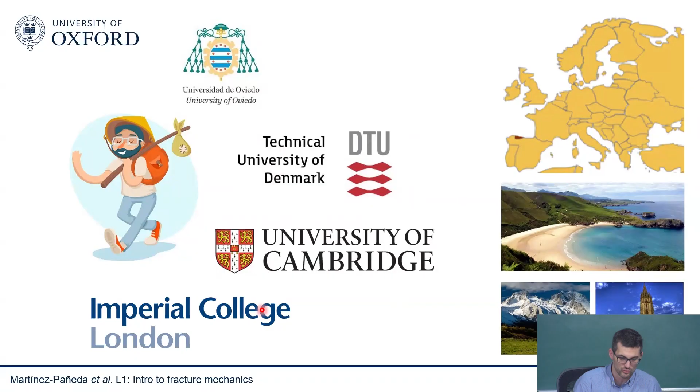This was September 2019. I stayed 4 years at Imperial, where I was a lecturer, which is equivalent to US assistant professor. Then became senior lecturer 2 years later, and then a year later became a reader. And then since a year and a half ago, I moved to the University of Oxford.

It's a great place, I feel very privileged to work there. It's a very old university with old buildings, as you can see here, and very old traditions.

We're a bit Harry Potter style, so we have these formal dinners. Some colleges have it, we all belong to a college, it's a bit of a long story. We have these formal dinners with our gowns and so on. Some colleges have it every day of the week, my college has a couple of days per week. So if you're around in Oxford, let me know, I'll be happy to invite you to one of those dinners. But yeah, it's a great place.

I think it's a very international environment, of course. There's people from everywhere, also from India, lots of people from India in fact. But it's the best students from all over the world, so it's really a pleasure to work with people there. It's really a great place, I feel very privileged to work there.

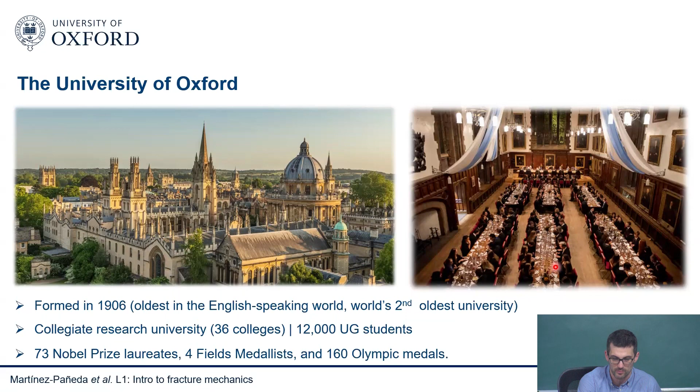What I do at Oxford is I lead a research group called the Mechanics of Materials Lab. It's a very diverse and relatively large research group, one of the largest in the department I've been told. So we have now 11 postdocs and 10 PhD students, and you can see it's quite a diverse group.

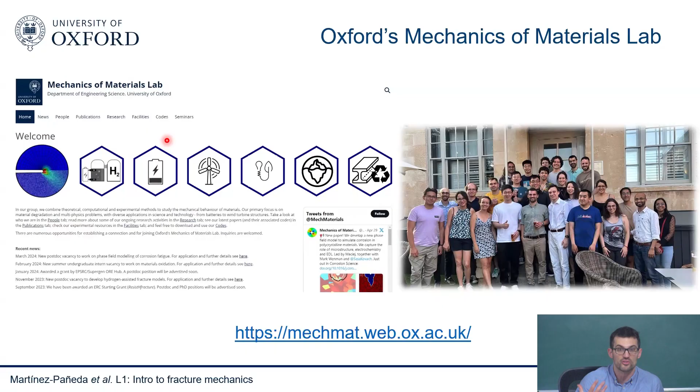The problems are exciting. They're fundamentally challenging, but at the same time useful to society and interesting from an engineering perspective. So we're working on a wide range of problems along those lines.

Some of them you can find here. We do a lot of work on structural integrity, related of course to the energy transition, but not only—lots of interesting problems across. If we think of applications: offshore wind energy, nuclear power plants, and so on.

We're also interested in iceberg calving. This is again related to climate change, in the sense that whether sea level will rise a certain amount, or more or less, depends on these fracture problems—basically crevasses growing in an ice sheet. So we're trying to use fracture mechanics to predict sea level rise more appropriately.

Rock fracture as well, of course. The mining industry consumes 6% of the world's energy consumption just by breaking big rocks into smaller rocks. So by understanding fracture mechanics, we can bring down that number.

Low carbon cements—there's a lot of interest in cementitious materials, particularly in changing Portland cement for other binders. So we need to do some sort of micromechanics to understand how these new low carbon cements will behave and what their structural performance will be.

Corrosion and corrosion fatigue—problems at the interface between mechanics, material science, and chemistry—are critical to many applications. They've been a problem for society for a century, and they're critical to applications like nuclear power or offshore wind energy. Concrete durability as well—there's a lot of work going on in corrosion of concrete.

A lot of computational mechanics too. In fact, we do both experiments and modeling in my group—I'd say roughly 30% of the group does experiments, 70% does modeling. But mostly this week I'll be focusing on our computational efforts.

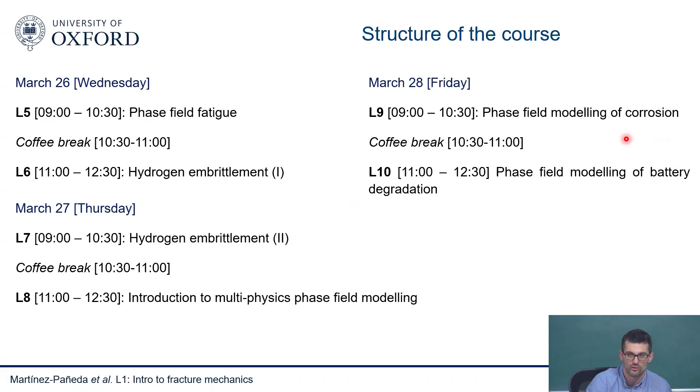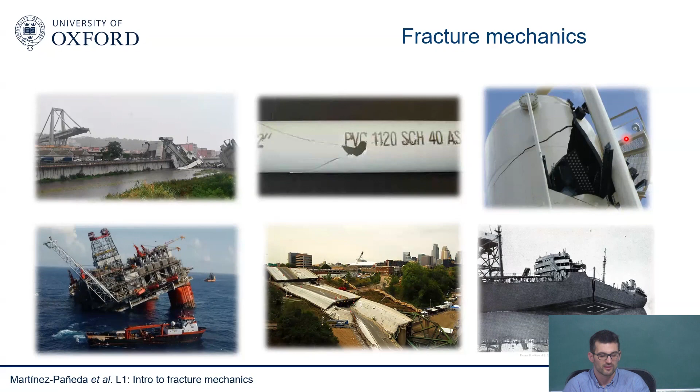So, okay, what can we do? How was the discipline developed? I think the best way to look at fracture mechanics is by taking a historical perspective. When did humans realize that things were falling down and they needed to come up with a scientific discipline that would explain how things fail and what to do under those circumstances?

And I think the topic is of course old - things have been failing for quite a long time. Of course many old constructions remain; if you go to Rome you'll find the Colosseum, which is an amazing structure. But for every old structure still standing, many temples around us have collapsed and we just don't know about it. For example, just 5 kilometers from the Colosseum, the Fidenae amphitheater collapsed, and 20,000 people died. So we know about the Colosseum, but we don't know about this - many things fail.

I think historically it's fair to say that engineers back then did more of a trial and error approach. They tried things, and when they didn't work, they adjusted. I think this amphitheater was actually made of wood, and they said, okay, wood doesn't seem to be good for these things, we'll do something else. So it was very much based on experience. In fact, legend has it that the Romans would ask the engineers and their families to sleep below the bridge they had just built, or the aqueduct, over the first night, just in case it fell down. They would be the first to suffer the consequences. I'm not sure if that's true, but it's a way of natural selection, I guess.

What worked in favor of the old engineers is that back then they were mostly working with brittle materials such as rock, mortar, or clay, and that's good and bad at the same time. Of course they're brittle, but at the same time they work very well under compression. Under tension, no way, but under compression they work very well. So they soon learned that what they had to do is work under compressive loads, so they came up with arches and other ways to make sure they didn't have any tensile loads. They were very limited in what they could do—you could say always the same shapes—but at the same time they didn't experience those tensile stresses that would fail their material.

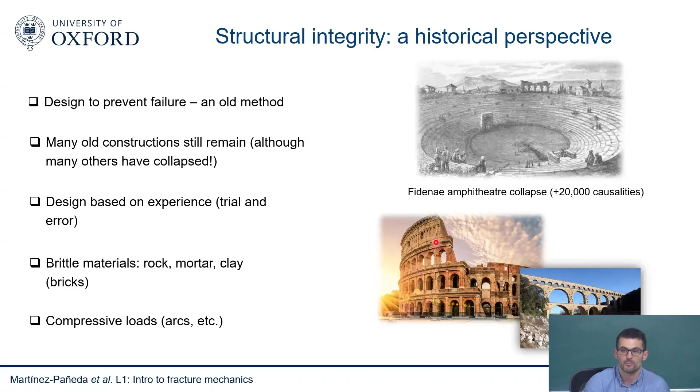Then the Industrial Revolution came, and new materials came around, metals being particularly prominent. Those, together with advanced design methods, allow us to design very complex structures, dealing not only with traction loads but very complicated stress states. That was, of course, a revolution, but it also brought new challenges and new fracture mechanics problems.

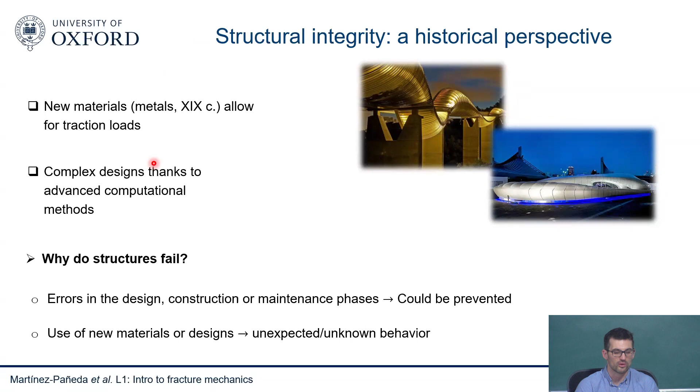In general, you could say that failures happen due to one of two reasons. One is human errors—errors in the design, construction, or maintenance phases. These are things we could have prevented; things failed under conditions that we understood, but we made a mistake, and as a result we got a failure. Or things fail due to the use of new materials or designs—this is unexpected and unknown behavior. Failures in modern aerospace technology wouldn't happen if we didn't have modern aerospace technology. So every time we use a new material or new technology, there's a challenge that comes with it, related to our lack of understanding, basically.

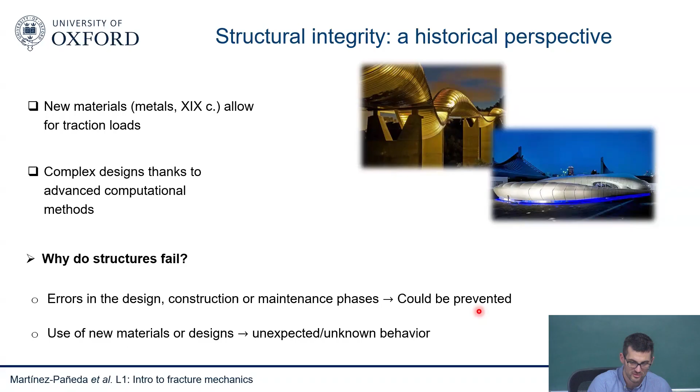If we think of failures due to new materials and designs, we could think of the failures in polyethylene gas pipelines that occurred in the UK and many other countries in the 90s. We used to use metals for transporting gas, and we still do, but there was an idea to replace them with polyethylene. We thought, okay, it's lighter, it's cheaper, it doesn't suffer from corrosion. But what they didn't realize is that it suffers from other problems, such as some sort of creep damage, which takes a long time to happen. It's not something you see quickly in the lab, so when they did their quick experiments, they didn't see it. But then over long time exposure, those cracks happened, causing a lot of explosions and issues.

Another very classic example is the Space Shuttle Challenger disaster. This happened a long time ago—I suspect none of you were born back then, and I wasn't either. But if you ask your parents, mine claimed it was a big deal. All the people, all the astronauts inside, died. It was a big problem for the aerospace industry. And of course this was NASA, so they were testing things properly—they knew what they were doing. But the problem is that one of the gaskets they were using was tested under room temperature conditions, and it became much more brittle under low temperature conditions. This gasket was exposed briefly to low temperatures, but for a sufficiently long amount of time that it caused embrittlement and fracture, leading to the disaster. So even though we test things carefully, every time we deal with new technologies, we need to think very carefully about what we do.

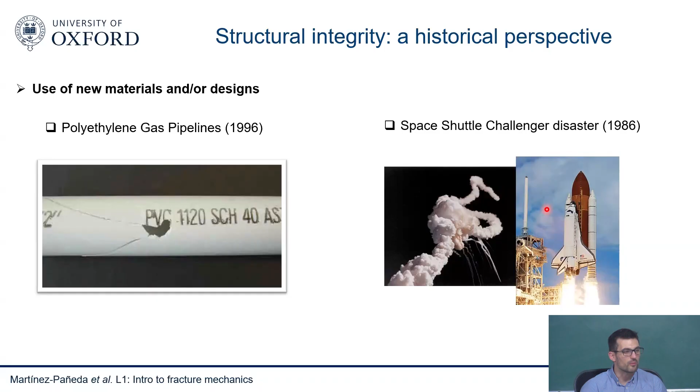Other classic examples are the Liberty ships. This is the classic example that gives you the birth of fracture mechanics. As part of the Second World War, the US was trying to help Europe, the Allies, so they tried to build ships as fast as they could. They built, I think, 3 ships every 2 days through the use of technologies that would really accelerate ship production. Back then ships were mostly riveted, so they had riveted joints, but the US decided to accelerate the ships by using welded joints.

And nowadays we weld, most ships are welded, but back in the day it was a new technology. What they didn't realize is that those welds would suffer, particularly in low temperatures, so lots of failures happened. I think they did almost 3,000 of the ships, and they saw cracking in 1,600 of them. So more than half of those ships underwent cracking, and 18 of them cracked in half, with, of course, a big loss of lives and resources. This happened due to a lack of understanding of how those welds would behave, and some sort of brittle-to-ductile transition, and some hydrogen embrittlement too, when those ships were going through near the North Pole.

Another classic example is the de Havilland Comet aviation accident. You may wonder when you fly on a plane why the windows are rounded. Well, of course, sharp corners lead to stress concentrators, so that's why we make our windows rounded. Back in the day, in fact, the windows had sharp corners, like they had in our house, basically. And you can see that nowadays it's quite blunt, quite smooth. You can see why.

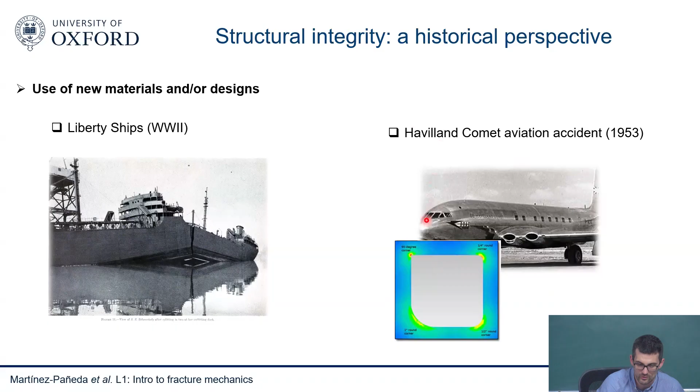This is a finite element analysis. You can see that in sharp corners you're going to get a higher stress concentrator, so you're going to have higher stresses, while if you have smooth windows, it's going to be a completely different picture. There were a few accidents, particularly this de Havilland Comet aviation accident, where you have fatigue cracks propagating and you lose part of the infrastructure of the plane, and they decided to change to smooth windows. But we're learning from those things, particularly through the birth and growth of this discipline of fracture mechanics. Bringing fracture mechanics into standards led to a significant reduction of those accidents.

Here is some old data from pressure vessel explosions in the UK. You can see how both the number of explosions per year and the number of people killed or injured are going down dramatically, as we get a better understanding as engineers and incorporate safer practices. Of course, cracks are responsible for most of these explosions, mostly due to fatigue or corrosion fatigue.

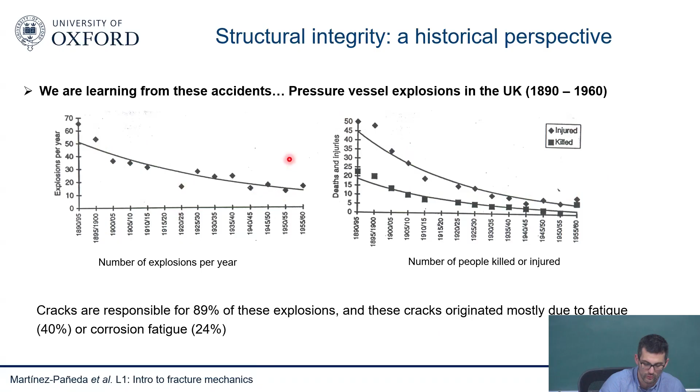So how did we learn? Of course, we always learn the same way, using what we call the scientific method. We come up with a hypothesis. We say things fail because of X. Then we think of an experiment, and we do an experiment to test this X phenomenon. Then we figure out whether our hypothesis is correct, or we refine our hypothesis and keep doing experiments.

I guess the first person to start doing experiments to try to apply the scientific method to understand why things fail was Leonardo da Vinci. He did experiments on iron wires, and he realized that the strength of those wires was sensitive to their length. So he thought maybe defects play a role, because what is the difference between a large wire and a small wire? The only thing is that maybe statistically the large wire may contain more defects.

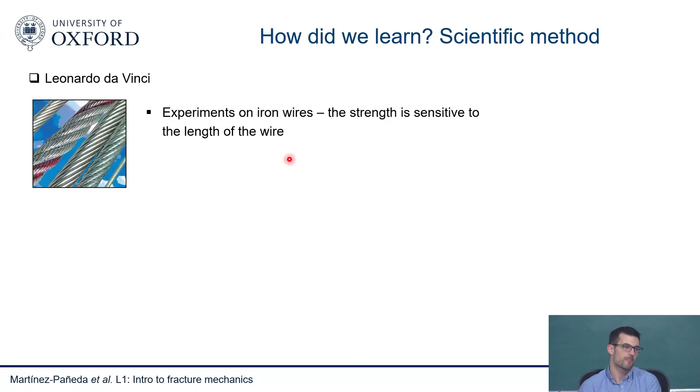This is something you see, for example, if you do tests on iron whiskers. If you plot the strength versus the size, you can see there's a very strong sensitivity of the strength of the material to the size. Eventually, if our piece of iron is big enough, we get to some sort of plateau where we have enough distribution of defects, so we're basically in the same spot. That's what we normally call the strength of our materials. But if you start going into small scales, looking at microns here, your strength appears to be very sensitive to the defect size, up to the point that the strength is 10 times roughly as large when we have very, very thin whiskers.

When people talk about graphene being the strongest material in the world, one has to take that claim with a pinch of salt, because graphene is one atom layer thick. So they say graphene is 200 times stronger than steel, for example. Well, that compares a large chunk of steel with a one atom layer of graphene. If you consider one atom layer of iron, then the strength of graphene and iron are more or less on the same order of magnitude. So defects seem to matter.

Nowadays we can predict, either using atomistics or theoretical considerations, what is the theoretical strength of materials. We roughly know it's the Young's modulus divided by 10. So for silica glass, which is a model material we'll discuss later, we have a Young's modulus of 70 gigapascals, so a failure strength of 7 gigapascals. But when we do experiments in the lab, we show that this failure stress, this strength of silica glass, varies between 1 and 100 megapascals.

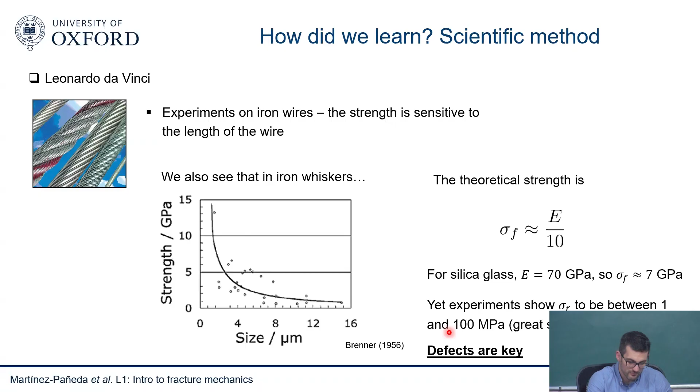So defects are important. This is what they realized. They realized that the failure of components, structures, and materials must be dependent on small defects growing, and at some point, due to some combination of stresses or whatever that was, this is what scientists and engineers turned their eyes on. Inglis, who was a British civil engineer and mathematician based at Cambridge, decided to mathematically analyze the stress fields ahead of a defect.

First of all, if you have a perfect circle, A equals B, then the stresses ahead of the tip of your circle are going to be 3 times the applied stress, and this is something mechanical engineers know by heart. 3 times - you always get a stress that is 3 times as large.

Then the other thing you realize is that if my ellipse is quite sharp, if B goes towards 0, my stresses at the tip of my ellipse are going to be infinite. That was puzzling to a lot of people because, of course, nothing is completely sharp, atomistically sharp. But some defects, particularly in brittle materials such as glass, as we discussed before, can be very, very sharp, up to the point where B could be tiny, nanometers long. And if this is nanometers long, this means a tiny applied stress will lead to a very, very large crack tip stress.

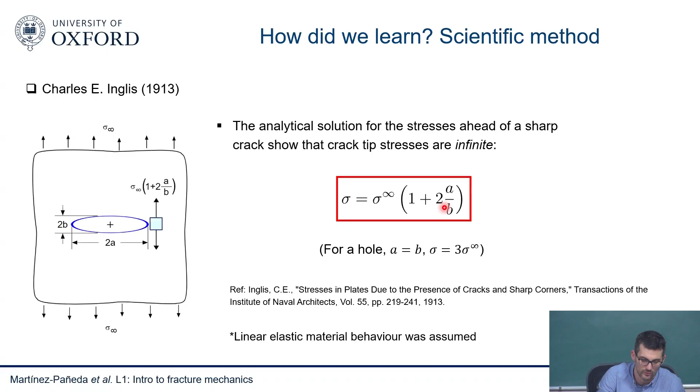And then came Alan Arnold Griffith, a British mechanical engineer working for Rolls-Royce at the time. He realized that the analysis was fine, it was all mathematically rigorous, but the problem lied in the criteria for growth.

It cannot just be that a crack, a defect, will grow whenever your stress was big enough to reach a critical quantity. He thought we need to think about this problem based on atomistics and thermodynamics. So he conducted some experiments in glass, and he adopted an atomistic perspective where he said, if I look at two atoms, I can plot the force versus the separation of those atoms, and it looks something like this.

So you apply a force, and you have a displacement in the atoms. Initially those atoms are at some sort of equilibrium. It takes a lot of time and effort to separate them. But eventually, when you reach a critical point, separating them becomes much easier. At some point the atomic bond strength is broken, and those atoms are free to go apart. That's the idea.

And of course, if you have this force versus atom displacement curve, the area under the curve gives you the energy. So there's an energy associated with separating atoms. If we take that approach and extend it to the general case of a material with many atoms and a given crack length, we can consider that we have many atoms that we need to pull apart. So the energy required to pull apart those atoms will be basically this.

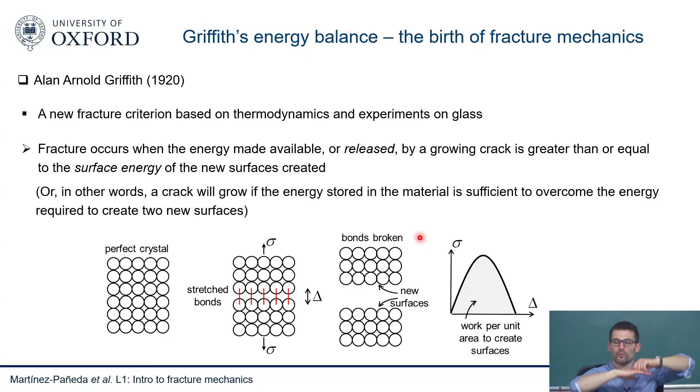So you stretch the bonds, you create two new surfaces, and that's the energy. So there's some energy that is stored in the material, and that energy is going to become this. When it's big enough, you're going to release that energy as part of the energy you need to pull apart atoms.

And you can see that easily. So I guess the question is, where does this energy come from, right? So I identified that I have some energy, some resistance to fracture. I need some energy to break atoms apart. And what is this energy?

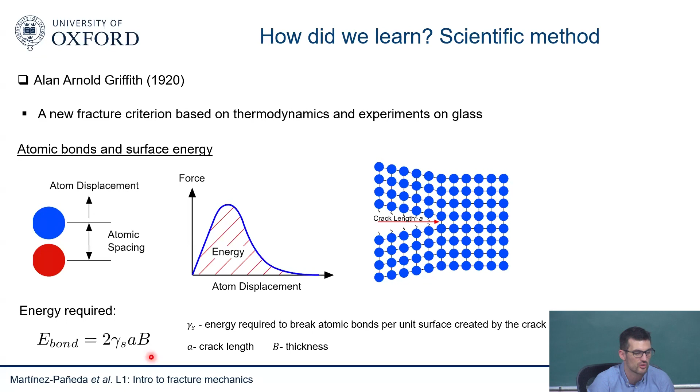If thermodynamics tells me that in order to achieve this energy, the energy has to come from somewhere, where does this energy come from? Well, the energy comes, of course, from the strain energy. So the work that we do where we apply mechanical loads. And if you think of the simplest case of a bar subjected to uniaxial tension, again, let's think of linear elasticity. If you plot stress versus strain, it looks something like this.

So you get it's a linear behavior, and of course the strain energy density is the area under the curve. And then you can see that, of course, we can define the strain energy density U, the strain energy as U being equal to psi, which is the strain energy density multiplied by the volume, and then the strain energy density we know that is 1/2. It's a triangle of base. It's basically 1/2 of sigma multiplied by epsilon, the strain, and then of course because we're using Hooke's law, sigma equals Young's modulus multiplied by the strain, so we get something like this or something like this. This is all the same.

So again, the assumptions are linear elasticity, Hooke's law, 1D. So sigma equals Young's modulus multiplied by the strain, and we know that the energy under the curve is the strain energy density. So if we want to calculate the energy of a bar, then it's this. And what happens is that when you break the bar into two halves, then that energy disappears, right?

So imagine I'm pulling my bar, and then fracture happens, and I end up with two unloaded bars. So you unload. If you think of a uniaxial tension test, you're pulling your bar. The moment the bar breaks into two halves, you lose all the load. You're not carrying anymore. If you plot the force versus displacement curve, it will go up, and then boom, it will go down. So that energy that we have stored, eventually when things crack, you unload your sample, and this strain energy becomes zero because you have no load anymore. You carry no more stress.

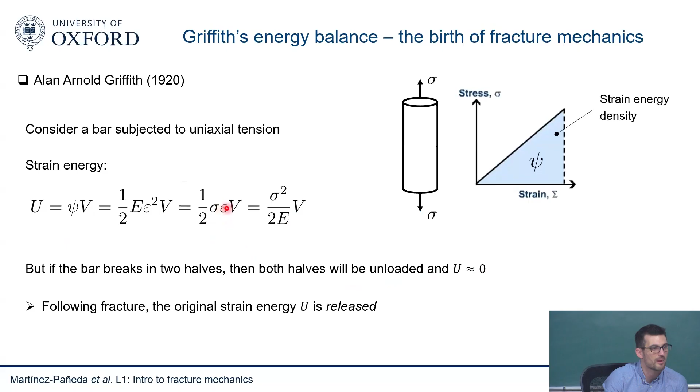So he looked at this semi-infinite plate subjected to uniaxial tension. And I'm not going to do the math, but he basically computed the strain energy. This is the case of a bar, remember, the same, Hooke's law. So, the energy under the bar is 1/2 sigma epsilon. Considering Hooke's law, we get something like this. So this is the bar without a crack.

But then he did the analysis, considering that we had a crack of length A. And I'm not going to do the analysis mathematically. You can find in the paper is very nice, the Griffith's paper, 1920, Royal Society. So you can take a look at it there if you're interested in the derivation.

But the idea is that whenever you have a plate with a crack, you're going to have two portions of material that are unloaded. And these two triangles, basically, these areas of unloaded material, because of the presence of the crack, are going to be triangles of basically base A and height pi A. So basically what you end up is that your energy is this, minus the unloaded material, which is the same, but over this volume, basically, over b pi a to the power of 2.

So this is the triangle, and then over the thickness, of course. These red lines show what the stress field looks like. Whenever you have a crack, if it occupies the whole thing, then this should go to 0.

This is for the case of a semi-infinite plate, but it allows us to understand the competition between energies. The total energy in the system is the sum of the energy required to break the atomic bonds and the mechanical strain energy. So this is the whole thing.

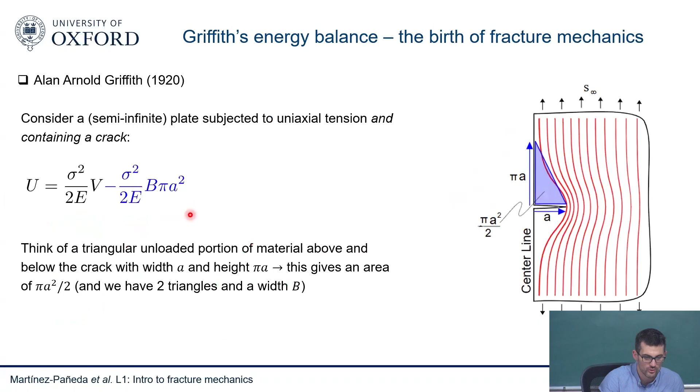Remember, this is the energy required to break the atomic bonds. For a crack to grow, I need enough energy to separate those atoms apart. This is what we discussed before: 2 times the surface energy times length of the crack times B. And this is what we just derived, the strain energy minus the unloaded version of my strain energy due to the growth of the crack. If I plot these things, y-axis is energy, x-axis is crack length.

I can only grow my crack if I keep putting energy into it, so I need to keep increasing my applied load. Remember, my mechanical strain energy increases with applied load. But eventually I reach a point where I don't need to apply any more load - cracking appears in an unstable way. My crack grows immediately without the need for any more applied energy. So there's a critical point where cracking is unstable, and the crack can grow without any additional energy input.